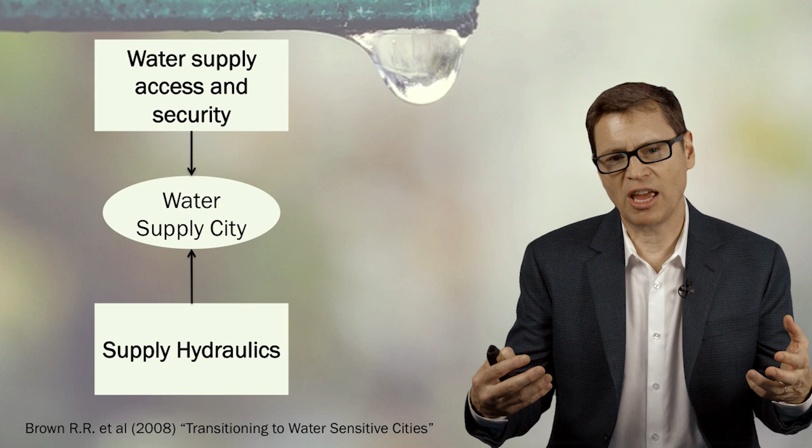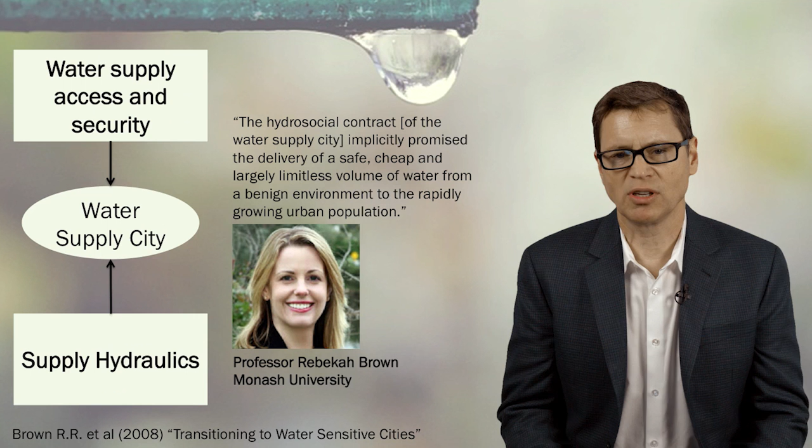And then the engineers come into that because they actually have to make that happen, right? And they provide the technical know-how, which for this particular hydrosocial contract comes down to supply hydraulics. So it's all about hydraulic engineering. So we have the hydrosocial contract at the top, which is essentially driving the investments and technology and know-how. And then we have the supply hydraulics, which is the actual implementation of that hydrosocial contract. And so you can see the hydrosocial contract at the top and the engineering tools at the bottom. And so this is what Rebekah would say about the hydrosocial contract for water supply cities.

She would say it implicitly promised the delivery of a safe, cheap, and largely limitless volume of water from a benign environment to the rapidly growing urban population. And if you think about Los Angeles, basically that hydrosocial contract, the water supply city, is brilliantly summed up in William Mulholland's statement when he first opened the LA Aqueduct in 1913, November 5th. He said, "There it is, take it." He was a man of few words. And essentially in those few words, he embodied that idea of a water supply city. We will provide the water, you take it and use it.

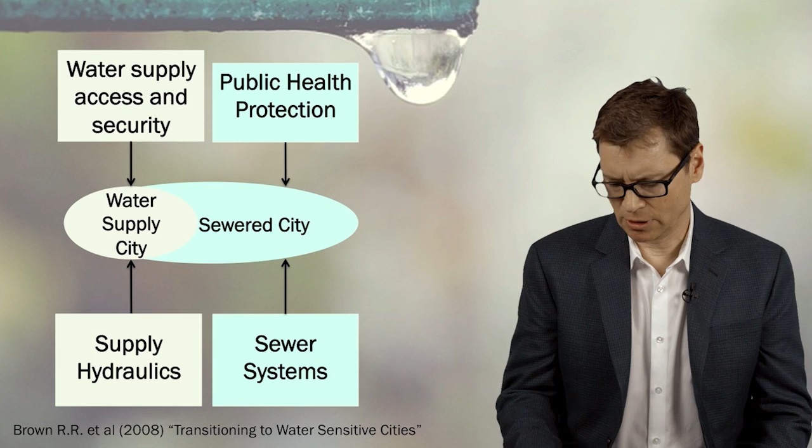And so as cities then begin to develop, they have a secure source of water, and so their populations begin to grow, then another concern becomes prominent, and that is public health. Certainly back in the 1700s, 1800s, this manifests as horrible epidemics of disease, most particularly cholera. And so basically the idea here is we'd like to change or evolve our hydrosocial contract. The citizens demand a change in the hydrosocial contract, so it's not just about water security anymore, it's about public health protection. So that's the top box there. That's the change in the hydrosocial contract. How do we implement that?

Well, we task the engineers with going about and building sewer systems, which by and large are gravity drain systems using the same kind of physics, hydraulics, hydraulic engineering that they use to develop the supply hydraulics. So they're really using the same tools, but they're adapting them now to the development of sewer systems, which were all about moving sewage away from the city. Just like in the first case with water supply city, it was about moving the water to the city.

In particular, most of the water that rained in a natural catchment would go back to the atmosphere as evapotranspiration. But if you replace those trees and grass with pavement, which doesn't evapotranspire, that water is just going to sit there. So what used to go right back up into the atmosphere now is going to sit on the ground. Worse than that, we've created these impermeable surfaces so that extra water can't infiltrate into the ground. And so if it can't infiltrate into the ground and it can't go back into the atmosphere, you can guess where it's going to go. It's going to go into your homes, your businesses, and so forth.

And so once again, we bring in the engineers and we have them design a drainage system which moves that stormwater as quickly as possible from the city to a receiving water. And so everybody's happy with that, I guess, except for the fact that all of that runoff that we're moving very quickly to receiving waters actually has two bad things associated with it.

The first is that the receiving waters, we're talking about rivers and lakes and coastal oceans, are not used to receiving the volume of water that we're sending to them. Remember, most of the water went up as evapotranspiration. Most of what was left was infiltrated and very slowly through the ground moved to local streams or coastal ocean.

Now suddenly we're delivering a much larger volume of water and we're delivering it much more quickly to these sensitive environments. And all of the organisms, the ecosystems that have evolved there are not evolved to deal with all of that extra water. And so the net result is that you have a lot of ecological damage.

Added to that is the fact that that stormwater runoff also contains a lot of pollutants from the urban landscape. So you actually have this kind of deadly one-two punch where you're delivering a lot of volume all of a sudden to sensitive receiving waters, and that water is also very polluted.

And so that really leads to an evolution of the hydrosocial contract, which I think one can actually look in time and identify a sort of point in time, almost globally, where awareness of the impacts of our drainage systems on the environment became really important. And that was during the 1960s, when suddenly there was an awareness that environmental protection was a really important part of what humans should be thinking about.

So that was probably a transition that occurred again starting in the 1960s through the 1970s, even to when I got my Ph.D. in the early 1990s, that was kind of the dominant paradigm. But what we're finding now is a new evolution. Actually, this isn't just an evolution in a particular city like Los Angeles or Melbourne, Australia.

It's very profound. Some scholars refer to it as a new epoch in human history, where instead of us always looking for the highest quality source of water, or maybe bringing high quality water from a long way away, we're essentially tapping that out. We're running out of those high quality water sources. And so what we're doing now is we're actually tapping local sources which are not so high quality. So that's the genesis of wastewater recycling, for example.

Our particular project, this NSF PIRE project, is really interested in green stormwater infrastructure which captures and uses stormwater runoff, which is another type of low quality water. So all of these activities to try to capture local sources of water and use them are really a fundamentally new type of phenomenon in human history. And they all come about from an understanding that there are limits on natural resources. So our hydrosocial contract is now being evolved again to recognize those limits.

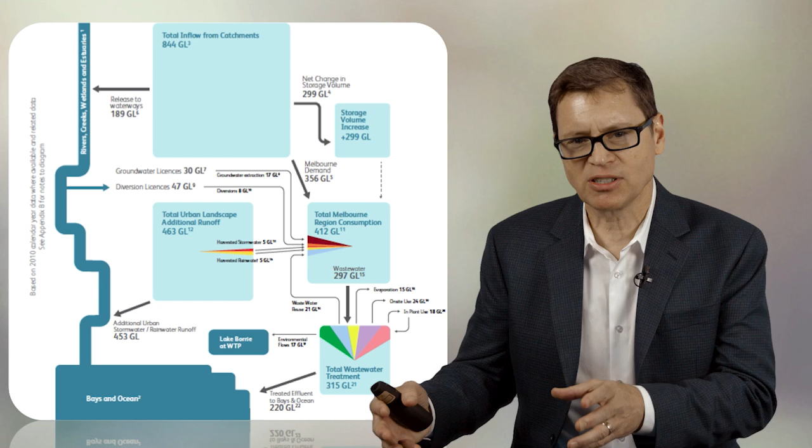Now, I mentioned that we're in a new epoch in human history where we're beginning to sort of connect these systems which used to be very linear. You can see the vestiges of the linear system here, right? You start up at the top with this huge volume of water coming in from the protected catchments. Most of it goes into the city for consumption, and then most of that goes to the sewage treatment plant, and then finally it's discharged to the ocean. It's sort of a one pass-through system, and that was the vestiges of those old hydrosocial contracts.

But now what's happening, and will happen to an increasing degree in the future, is that we're beginning to see arrows looping back upstream into the system. So for example, some of the wastewater that's treated in that bottom box is now being looped around back into total Melbourne region consumption. And so that's the little blue slice of the pie there. And that is usually used for things like irrigation of parks and so forth.

There's also another box which I haven't really talked about, but is extremely important, and that's the volume of water, 463 gigaliters, a huge amount of water that's generated as runoff from the city's pavement and impervious surfaces. So in fact, if you compare it to the total inflow from the catchments, it's actually over half the total inflow from the catchments. Where does that urban runoff go? Well, 453 of the 463 gigaliters gets discharged directly to rivers, streams, and Port Phillip Bay.

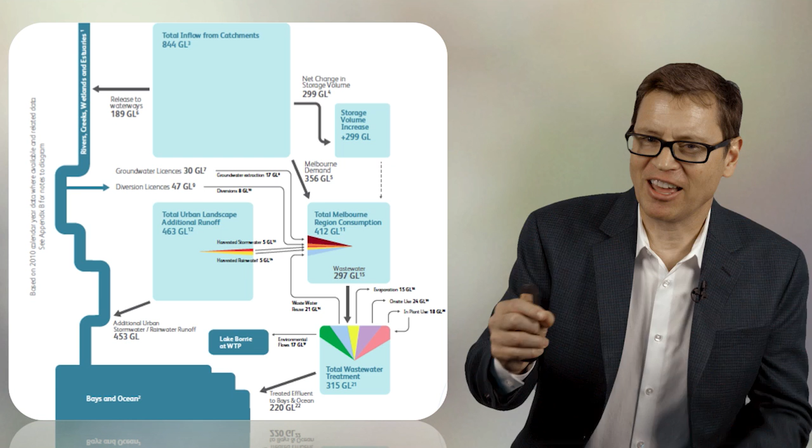And as I mentioned, not only is that a waste of water, but it's also very harmful for the ecosystems that are not used to the volume of stormwater they're receiving, nor are they used to the pollutants that are generated from it. And so what I want to point out is that there's a tiny little sliver of water in that urban stormwater runoff, which in 2010 was being used for total Melbourne regional consumption.

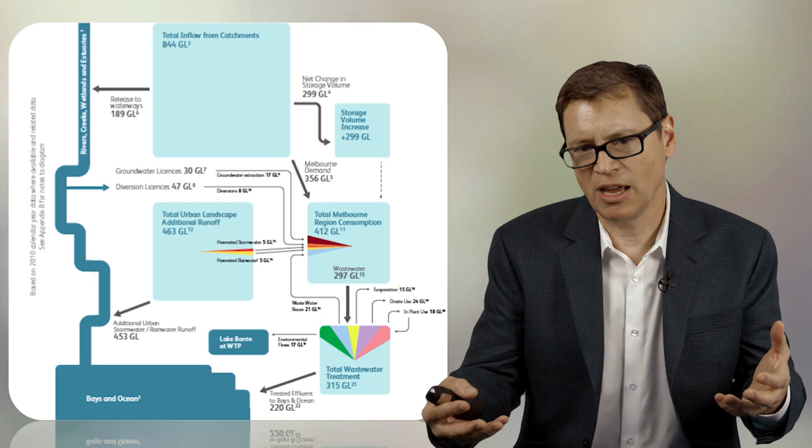And so basically what was happening is that in part due to the millennium drought, the city of Melbourne started to build green stormwater infrastructure which would capture some of that runoff and then recycle it for fit for purpose activities like, for example, irrigating parks and ultimately, probably on a more small scale, flushing toilets and the like.

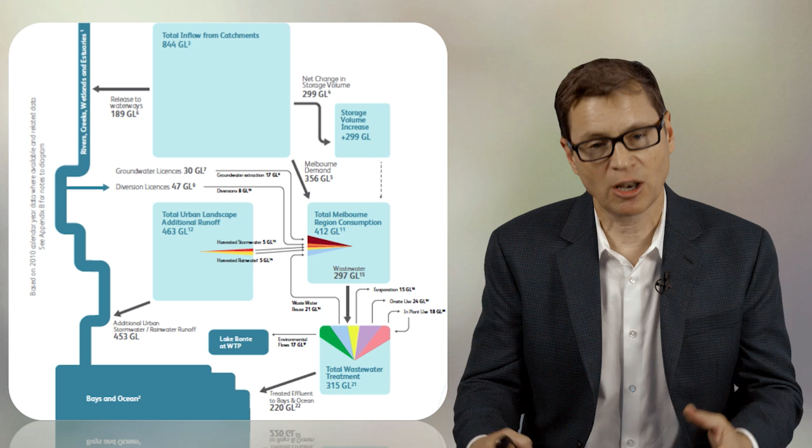The main thing I want to point out is that as time goes by, these activities, which we're just beginning to see the transition now, these activities of sort of reconnecting these usually very linear systems, looping them back, are going to happen to a greater and greater extent. And our particular project, the goal really is to provide the science and engineering technological expertise to accelerate that process or make it happen more smartly.

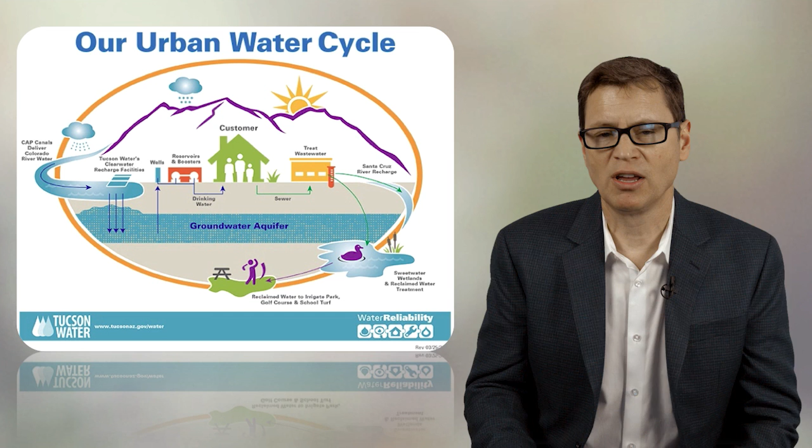The same kind of vision of urban water systems as being really an urban water cycle is cropping up all over the place. And so here's an advertisement from Tucson Water in which essentially they are also acknowledging the fact that as opposed to the one pass-through system we used to have, really all of our different water sources or water systems should be connected or are becoming connected. And that's really the right way to go if we're going to try to support the populations that we need to support, particularly in the face of climate change.

So are we at the end of that hydrosocial contract evolution? Well, Rebekah Brown would argue no. She would argue that the next phase, which no city in the world has achieved yet, is what she calls a water-sensitive city. And a water-sensitive city is basically taking all of those great things that we're doing, reconnecting the various kinds of water, using water more efficiently, and taking it to the next level.

So we begin to think about things like intergenerational equity. How are the decisions that we're making today about our water going to affect my children and their children, and so on? So are we locking ourselves into a path that could be maladaptive, could lead to problems down the road? I don't think we tend to think of it in that kind of long-term frame. We tend to think more in terms of political cycles. So who's up for president? And that changes every 4 years. So it's very difficult to transition, especially in a democracy.

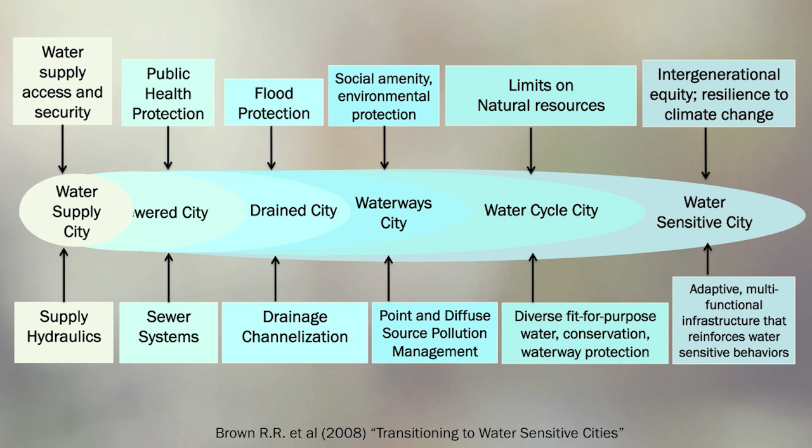I think it's very difficult, not that I'm arguing for no democracy, but it's very difficult to have these very long-range plans which maybe look 50 years or 100 years in the future and ask, how are the decisions we're making today going to set us up for a better future? And now we're really talking about an evolution of that diverse fit-for-purpose infrastructure into adaptive, multifunctional infrastructure that reinforces water-sensitive behaviors. And so again, the engineers are going to be required to take on a deeper understanding of how these systems should look and maybe a sensitivity to the diversity of opinions that have to go into their design.

So that's really, in a nutshell, hopefully, the concept behind a water-sensitive city and how our project really connects with that. I want to give you a few specific examples of technologies that we're focusing on in collaboration with our colleagues at Monash University and University of Melbourne. One form of green stormwater infrastructure that we're quite interested in is a technology that's called a biofilter. It's actually really simple. Some people call them rain gardens. And the idea is that basically they're kind of like vertical wetlands, in which you have essentially a layered system with maybe fine sand at the top and gravel at the bottom.

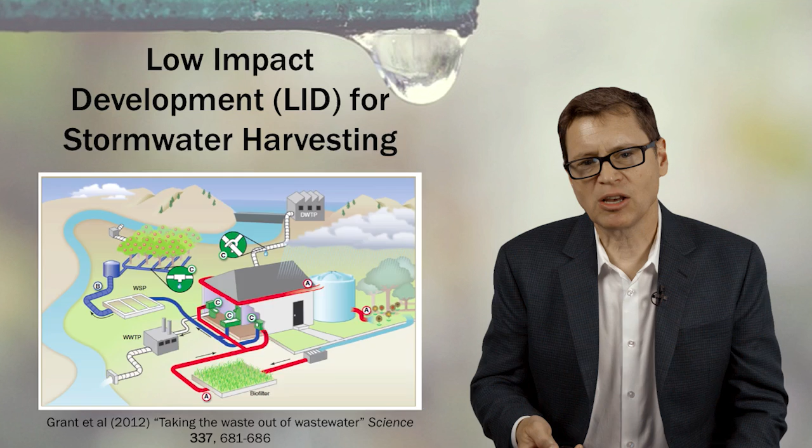And these are planted, and water, say stormwater runoff from roads or runoff from roofs, comes into the top of these systems, slowly percolates through the filter, interacts with the plants and the microorganisms and the animals that live in these systems, and then eventually reaches the bottom, and then the effluent can be used directly for fit-for-purpose activities such as toilet flushing again or irrigation. And if you look at it in a little bit more detail, these biofilters can actually be configured in a couple different ways, and we're going to explore this issue a bit later, but it really is important in terms of thinking about restoring the hydrology of cities.

So ideally, we would restore the hydrology of cities so that it was more like the pre-urban state, so we don't have the impacts on the receiving waters and ecosystems. So the neat thing about the biofilters is that we can actually tune them to achieve exactly what kind of hydrological balance we want. For example, we could make them bottomless so that the water that filters through them actually infiltrates into the ground and supports shallow groundwater and then also base flow in streams. Of course, some of that water filtering through the biofilter is going to go up as evapotranspiration back into the atmosphere through the action of the plants.

Anytime you try to keep the water out of the watershed, or essentially export it out of the watershed, and that could be moving it back into the atmosphere or maybe moving it to the sewage treatment plant, we call that harvesting, whereas if we allow that water to infiltrate and support groundwater or shallow groundwater, we call it infiltrating. So we see from this particular configuration where we don't have a bottom to the biofilter, there's some harvesting, that is some of the water is going up as evapotranspiration, and we also have some infiltration, water's going down into the groundwater.

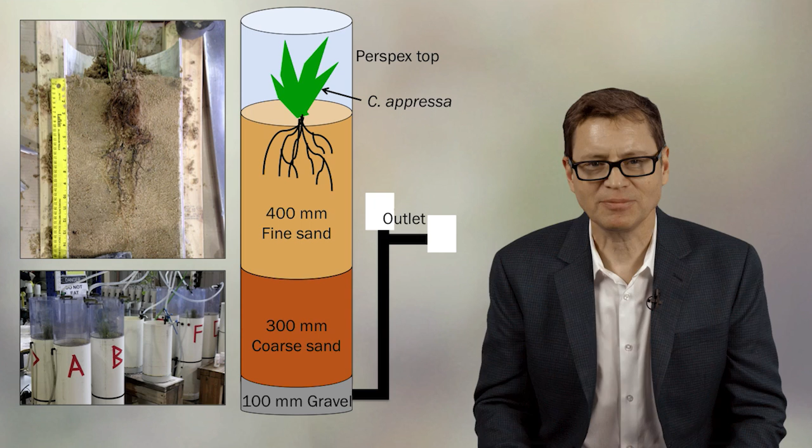So why haven't these things been adopted already? And that's something that we really have to turn to our social science colleagues to understand better. They told us kind of what the context was in which engineers were doing all the work that they were doing over the last 100 years or so, right, through the hydro-social contract. But they also tell us why it is very difficult for people to change the way that they do the things that they do. And one of the terms that's used a lot in the field is this idea of cognitive lock-in. It's the idea that basically there's a cognitive switching cost for changing what we're doing now to something that might even be better for us, but requires changing habits.

And in the context of these LID or low impact development technologies, or as they're also called green stormwater infrastructure technologies, the issue really comes down to a reinforcement that happens over time. So imagine a city develops around an area, say next to a stream, and cities tend to colonize around streams. As they build, and then you have the flooding issues that I mentioned earlier, the stream may become perceived as a threat, right? Because it's what can overflow its banks and then ruin your business and your home, and maybe even cause loss of life.

So if the starting point is that we, as a community, perceive streams as a threat, we lean on our managers to do something about it. And what they do is they turn to the engineers, who basically say, okay, what we can do for you is move that water as quickly as possible away from the city. And so they change the stream from a natural feature into a hydraulically efficient drainage channel, right? Which has a lot of what we call effective imperviousness. All of the different types of imperviousness are connected to the stream, which then drains very quickly, say, to the ocean.

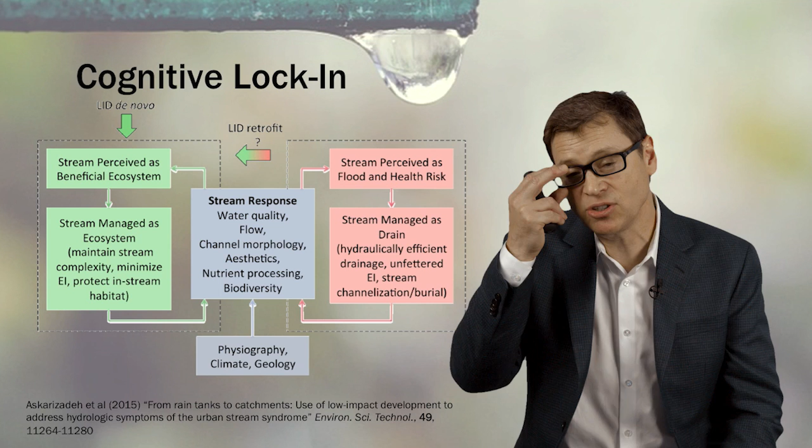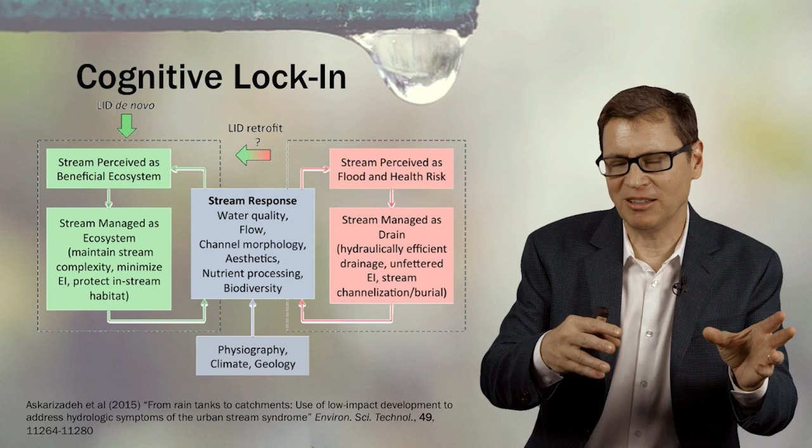And so I think our challenge, certainly in a megalopolis like Los Angeles or Southern California, where it's kind of a concrete jungle, is going from this right loop, where we've got the negative feedback going and the stream as a hazard, to the left loop, where the stream is considered a beneficial ecosystem.

Another thing that we can do is exploit the very best technology that's out there. And one of the wonderful tools that's emerging, if you're lucky enough to be alive in this day and age, is this idea of cyber infrastructure. So using computer systems that are linked to valves and control systems, which can, in real time, modify the flow through drainage systems. So the idea here is that we could actually modify our existing drainage systems to protect water quality. And some of these systems are actually being tested in the US and elsewhere.

Ultimately it's about making the drainage systems that we have in our cities as smart as the transportation systems we already have, or the food delivery systems. Incredibly intelligent systems, a lot of technology being applied to those systems, yet for some reason, maybe it's out of sight, out of mind, we don't apply that same technology to our water infrastructure.

So I hope that's a good overview of the project and the presentations to come.